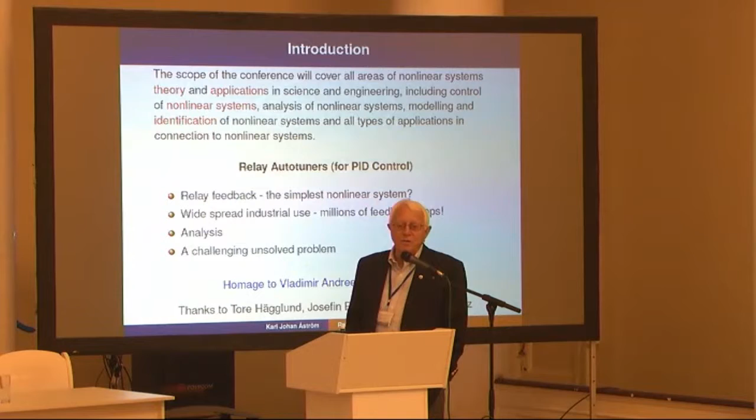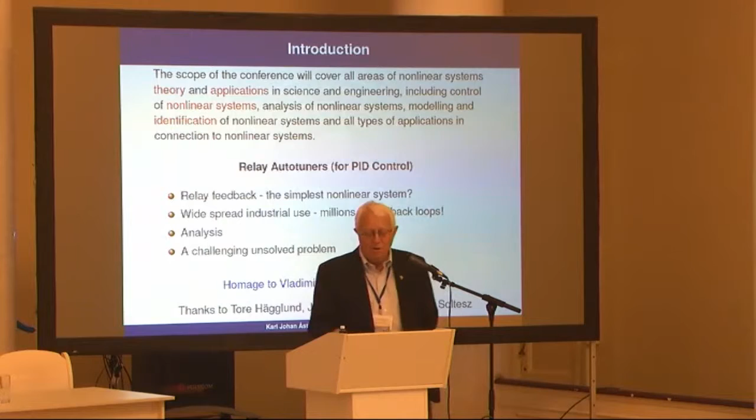I would also like to pay homage to Yakubovich. I met him about a handful of times at international Russian conferences. For me as a young researcher, he was extremely kind and helpful to me, and we also communicated by letter, so I'm very grateful to him. I also have a colleague, Tore Hägglund, who I've been working with for a long time on this. And then I have a new PhD student and a young faculty member currently working on these problems.

So, what about PID control? It's the most common controller. Here is a quote from 2002, where you look at typical industry, 98% of the controllers use PID feedback. You can go back 10 years. Here's an engineer who looked at Canadian pulp and paper, and he said 97% use PI control. I haven't seen anything more recent. He also looked at them quite well.

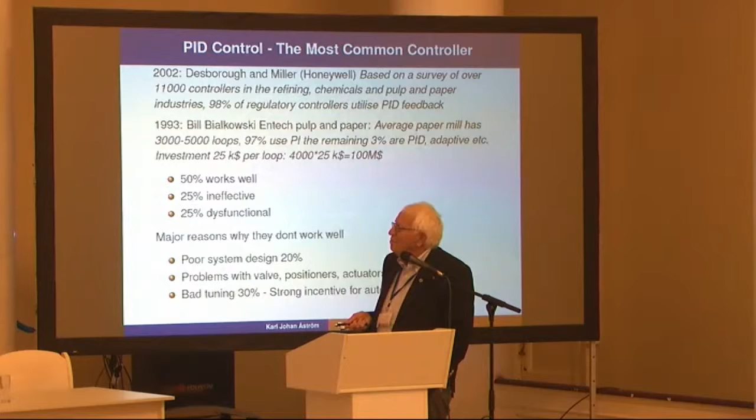About half of them worked very well. 25% are dysfunctional, increasing fluctuations instead of decreasing fluctuations. The main reason is bad system design, problems with hardware, but bad tuning accounts for 30%. So that's a good motivation to try to do automatic tuning to get rid of these problems. That's something I've actually been concerned with for quite a while.

So here is the plan. After the introduction, I will talk about the basic relay autotuner. Then I will talk about current work to make them much better. And then I will introduce what I call the million-dollar question, to classify all systems for which this will work. That's a very clean mathematical problem that I don't know the answer to.

So here's the idea of the relay tuner. You have a feedback loop, and to tune it, you flip over a switch, so the process runs under relay feedback, like a thermostat. Here I show some signal traces. Here's the relay, which switches, and here is the output signal. If you look closely, you see that the input and the output are roughly 180 degrees out of phase. So an experiment like this gives you immediately the frequency where the process has a phase lag of 180 degrees. Also, if you look at the amplitudes, you can get an approximation of the gain. Together with Tore Hägglund, we made patents of this in the early 80s.

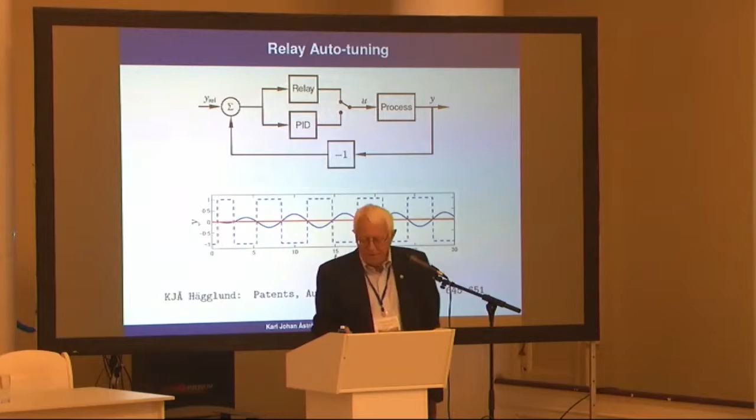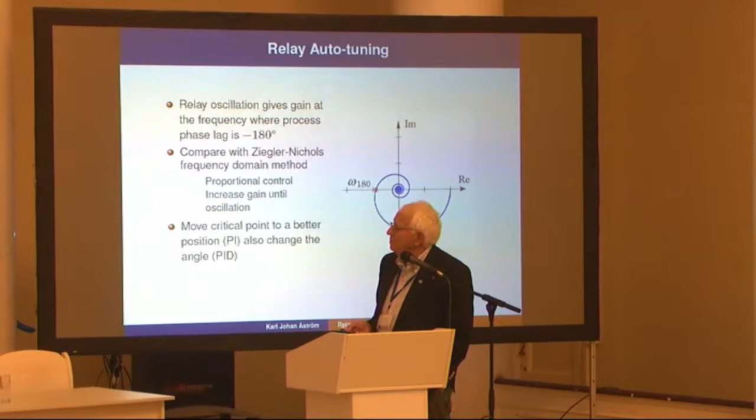We wrote the paper in Automatica in 1984. It turns out that these devices have some nice features. The relay oscillation gives the gain at the frequency, and then you can move this point to some other area with PI control. You have two degrees of freedom. With PID, you can change the tilt of it. So we rigged up a simple version to tune PID controllers based on this, and it has some very attractive features.

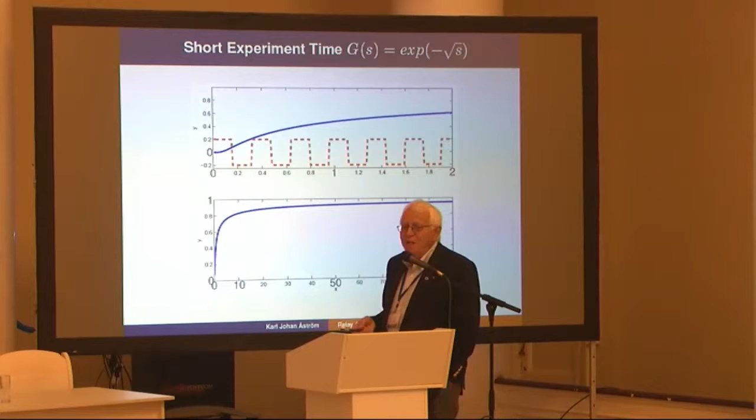For example, it has a very short tuning time. Here I've done an extreme example, essentially a heat conduction process. You see the step response starts very slowly, and then it finally goes up, taking about 100 units to get reasonably close to steady state. If you do a relay experiment, you already see in 0.4 time units that you have enough information to tune a PID controller. So it's much better than doing step responses.

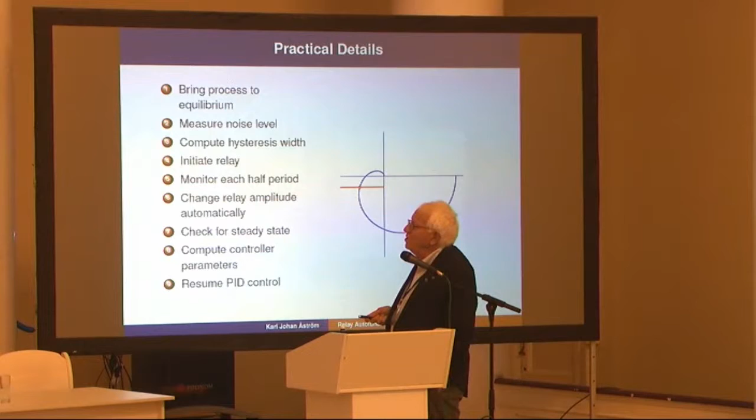There are a few practical details I'll mention quickly. You have to bring the process to equilibrium, measure noise levels, introduce hysteresis in the relay, initiate the relay oscillation, monitor half periods, check for steady state, compute controller parameters, and resume PID control. With hysteresis, if you're using describing functions, you're approximately picking up this point of the transfer function.

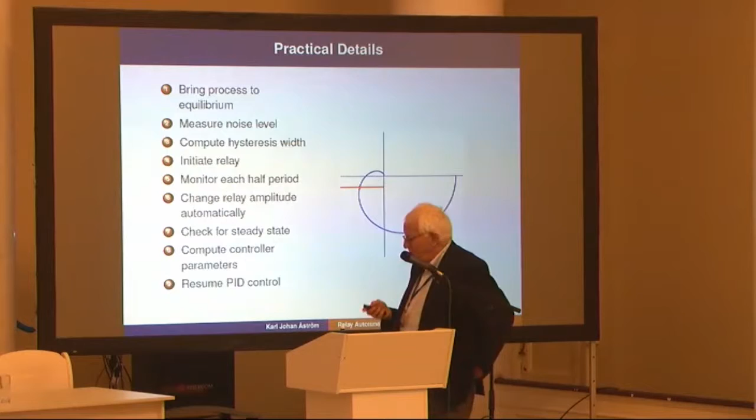So this simple idea has been very useful. When preparing this talk, I picked up the first industrial test, done in 1982. We took an Apple II computer, which we were using in the lab, and tied it to the industrial process control system at the Sugar Works in Arlöv. Here you see the experiment: here's the control signal, the relay, and here's the output. The signals aren't very clear, but here it goes into automatic, and we switch it like this. So it's an example where it's working pretty well.

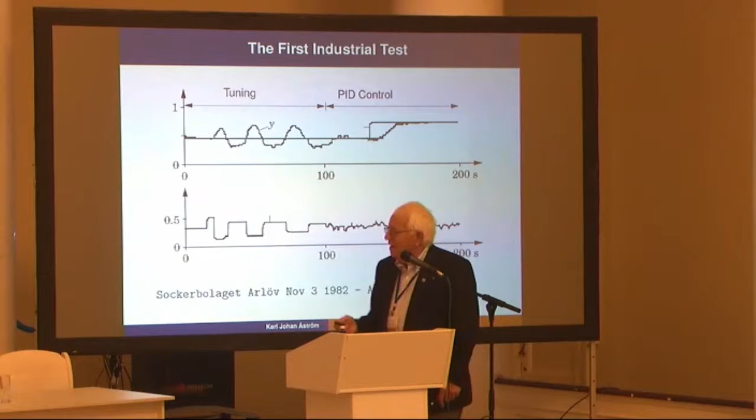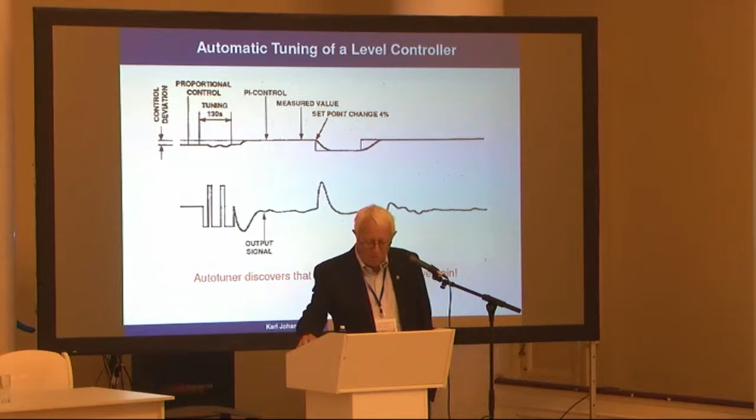Here's another example. You can also use this to figure out if you don't know the gain of the process, which is quite common. So here's an example: there's a tuning period, and then we test it by making a step change. It does pretty well, and in this case, the auto-tuner discovered that the process has negative gain, so the operators don't have to be concerned with that.

This has been implemented in many, many different ways. Before I do this, I'll show you an interesting experiment. We were at an industrial plant in northern Sweden, a small chemical preparation plant for the pulp and paper industry. They had about 100 loops, and it would typically take about 2 to 3 weeks to commission such a system. With the auto-tuners, we did it in 5 days — you connect one loop, tune it, connect another loop, tune it, etc.

Then the people came to us and said, we have this beastly process here that we've never been able to tune, can you help us with that? So we took one of our little boxes and connected it. Here's a strip recording where time runs in this direction, since the unit had no digital recording. You see this process is oscillating. They had a PID controller with a gain of 8, an integration time of 2000, no derivative action. Shortly before lunch, we switched it into manual, and you see it stops the oscillation when it starts to drift. At 2 o'clock in the afternoon, we pushed the tuning button.

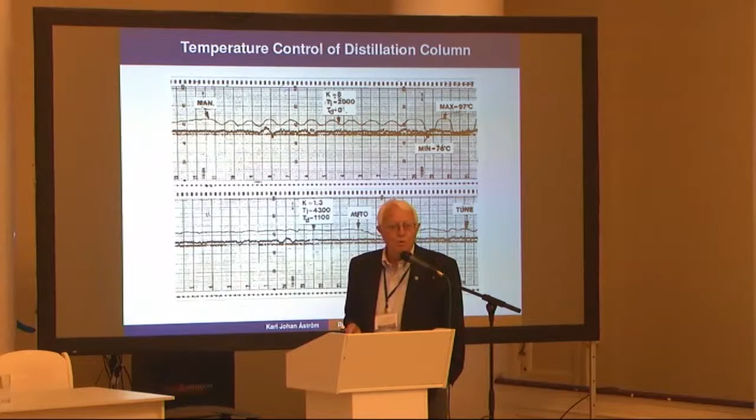Here you see we're determining the hysteresis level, and then you get something that looks like an oscillation. We were waiting and waiting — this is 2 o'clock in the afternoon. At 8 o'clock in the evening, it goes to automatic control. And look what it does — beautiful control. It reduces the gain and introduces derivative action. I think this is a very nice example, because trying to tune manually something this slow would take a long time.

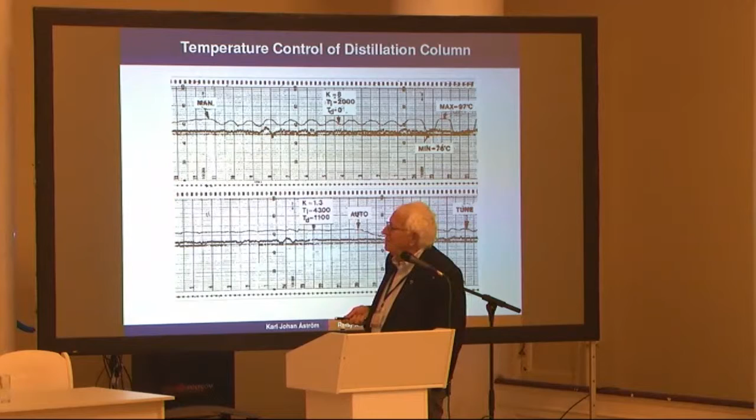And to try to tune manually something that is as slow as this, of course, will take a long time. So they have been manifested in many ways.

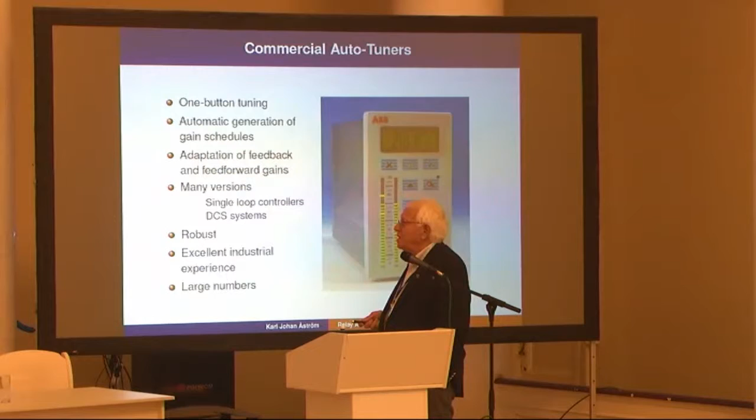It's called a one-button tuner. You can just push a button to tune it.

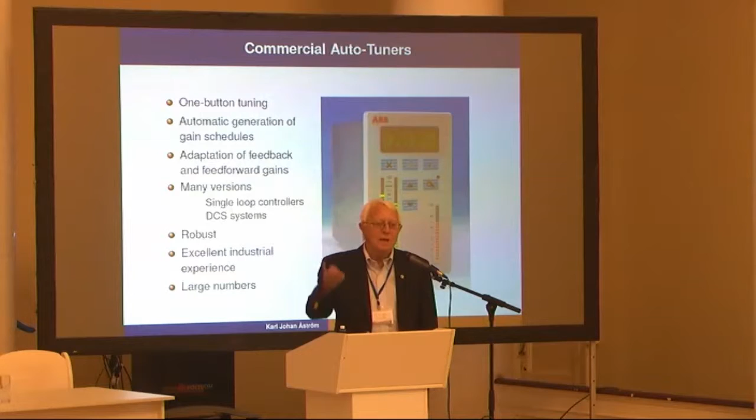We can also generate gain schedules automatically, because when using simple controllers, processes are often nonlinear. So you pick a scheduling variable, set up a table, and then operate in a certain region and push the tuning button. That's how you build up gain schedules automatically.

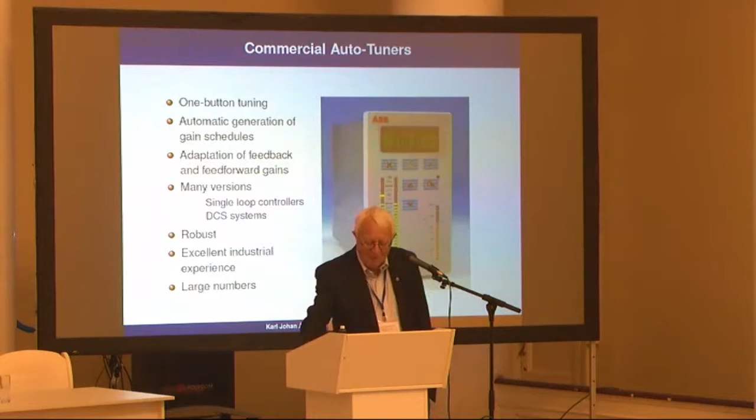You can also introduce adaptation of feedback and feed-forward gain, and there are many, many versions of this—single loop controllers, and others involved in DCS systems, etc.

I'll give you a couple of industrial examples. When we started, we worked with local Swedish companies. In the end, the patents were acquired by a large American company called Emerson, who put it into one of their large DCS systems. And of course, ABB did the same.

So this is where the mass use is coming from. These are typical distributed control systems, both of them, and there are also single loop controllers in here.

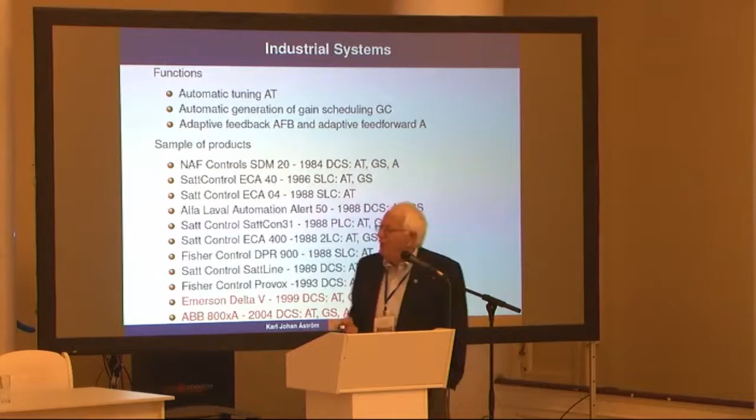I'll give you experience from Emerson, and here's what they say: the tuners can be used by production technicians on shift with complete control of what's going on. In other words, when running the plant, they can take the regular plant personnel and they can run it—the operator is aware of the tuning. And what's interesting, they can teach this and make someone useful in less than half an hour.

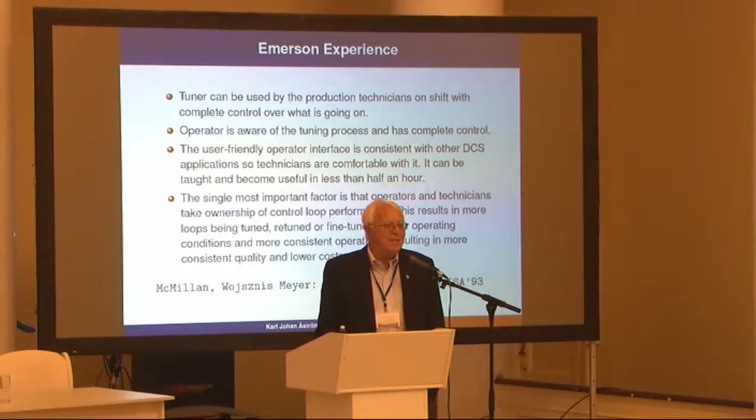Many industrial people are asking for PhD-free control—that is, controllers that can be used by people who are not PhDs. This is clearly one example of that, and it's documented in the paper we're citing here.

So that was a little bit about the basic relay autotuner, which was done 35 years ago, and then it took about 10 or 15 years to make it mature. Now we'll talk a little bit about more advanced autotuners.

First, there has been a dramatic increase in computing power. I still remember the first one we put in—the company said we could use it if we squeezed it into 2 kilobytes of code. Nowadays, of course, we can do much more.

So we can do better modeling. One thing we've discovered quite recently is that it's very useful to introduce an asymmetric relay—a small step in one direction and a much larger step in the other. I'll tell you later why this is so good.

We can also do system identification. Instead of waiting for steady state like we did in the old approach, we just capture a transient and run system identification on it. And if we don't get enough information, we can add additional signals to it.

We can also make assessments of several models here. Instead of doing the very simple thing we did first, we can now really figure out what complexity of model we actually need to describe the process.

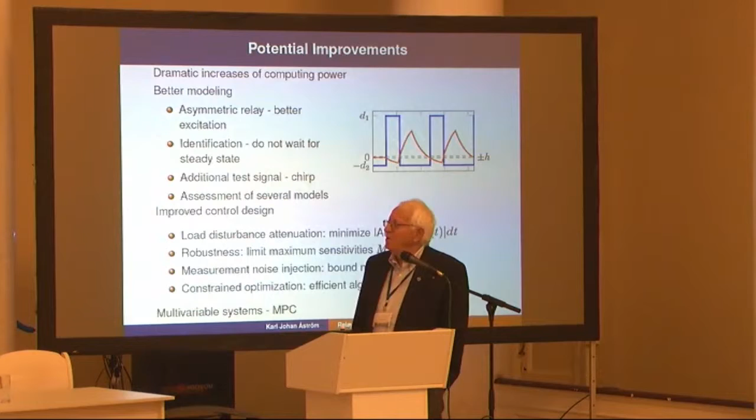We're also starting to look at multivariable systems, and I mentioned MPC here. One of the stumbling blocks for using MPC is lack of models, and we think this type of technique can be used very favorably to obtain the models you need for model predictive control.

So here's a little bit about the design of PID controllers. Many processes in industry have monotone or almost monotone step responses, and you can often approximate transfer functions by a time delay and a time constant. There's one parameter here that's important—I call it the relative time delay.

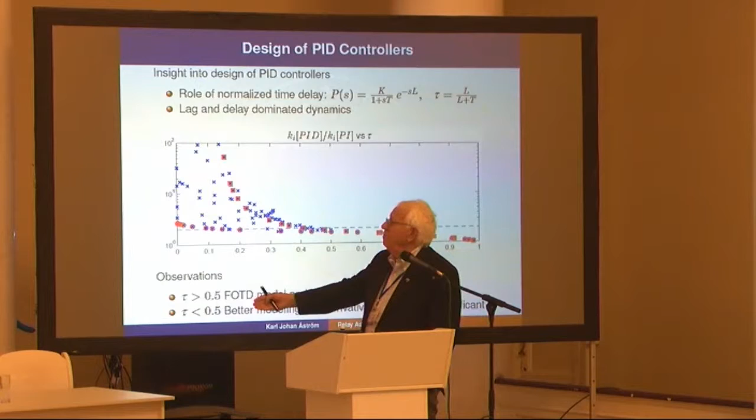It's the ratio of L divided by L plus T. So if tau is equal to 1, the process is dominated by time delays. If tau is 0, it's dominated by dynamics.

We've obtained large batches of representative transfer functions from our colleagues in industry—about 150 to 200 test examples that we run against. Using these test examples, we've been designing PID and PI controllers.

We've been plotting the integral gain of the PI controller, which is a reasonable measure of performance. High gain means good performance. We also plotted the gain of the PI controller as a function of the normalized time delay, and we got a curve like this. Here's the normalized time delay.

We see that if you are time delay dominated, PI and PID give essentially the same result. Then as we get more and more dynamics, PID gives roughly twice the performance up to 0.5. Down here, there's a very big difference between PI and PID controllers.

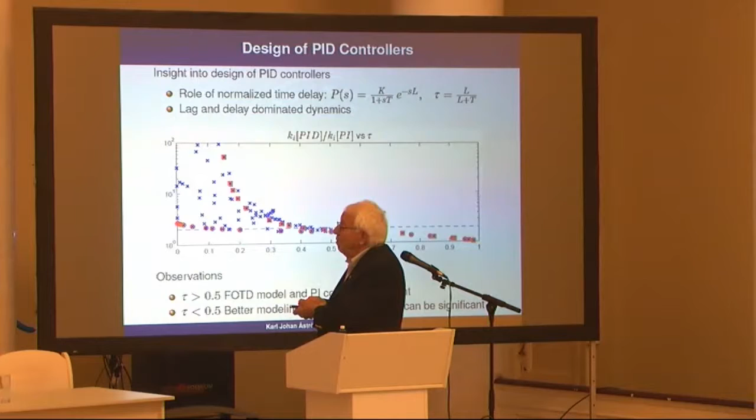So here is a region where improved modeling makes a lot of difference. Up here, we can just use a PI controller. In here, derivative action may pay off, and we can still use a very simple model to do this. Down here, it pays a lot to do much better modeling. So by doing empirical studies of this, we learned something.

We also have to do initialization and use the asymmetric relay. It very often happens that you have friction in valves and things like this, so we always start with a little exponential increase here.

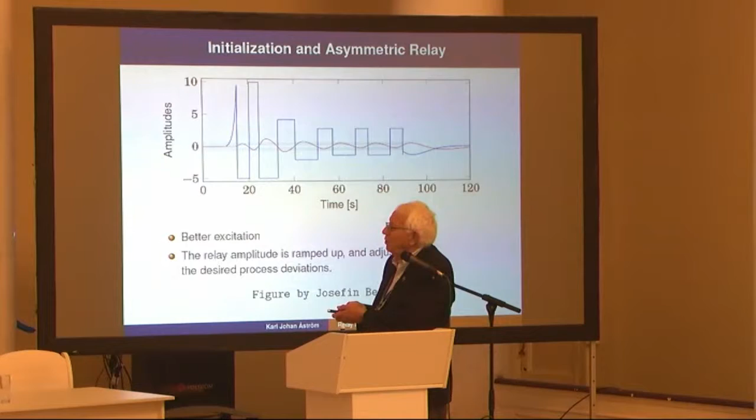There's an absolute limit to how much we can change the control signal, but the important thing is how much we allow the control signal to fluctuate. There's a simple feedback loop that arranges this. And also this startup feature gives you actually quite good excitation.

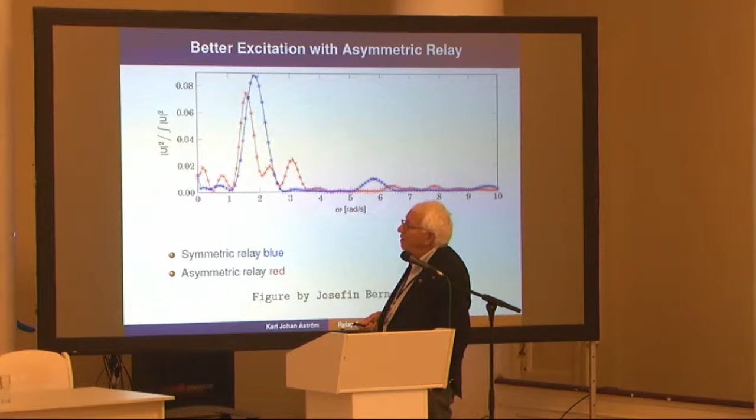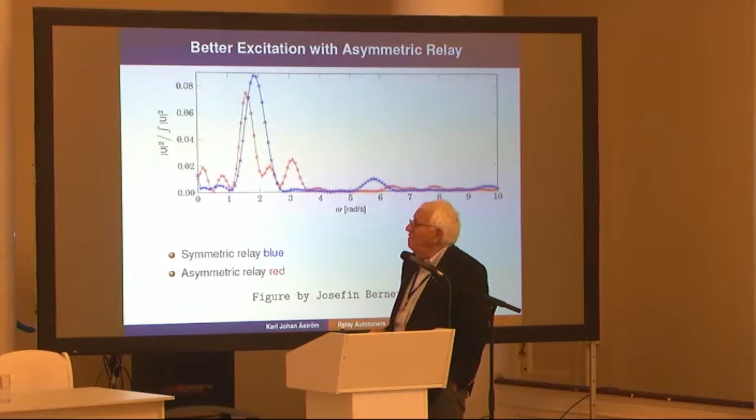When you use an asymmetric relay, you see you are getting a peak here, and two peaks down here. So the asymmetric relay gives you much better excitation, not just around this frequency, but spreading out a little bit. So it's a useful, practical little thing.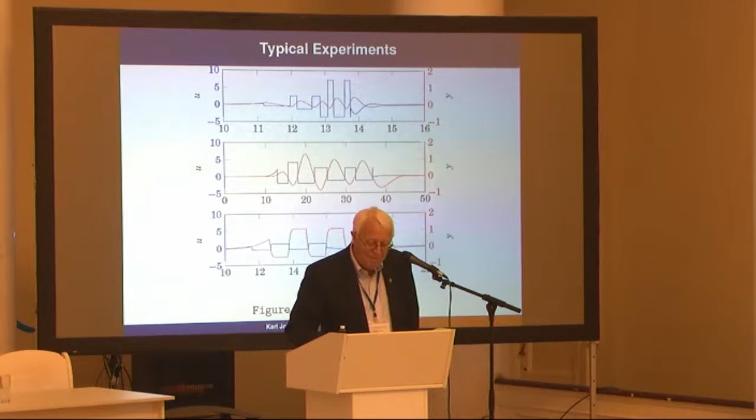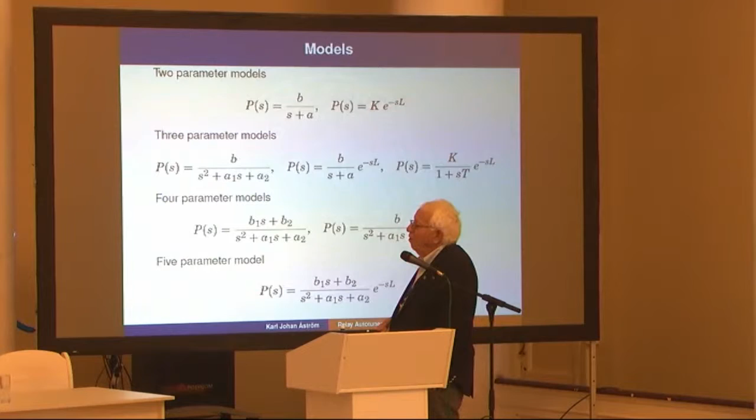Now I'm going to skip this. When you do system identification, it's very useful to try to fit a spectrum of models. These are some very simple ones, here are some slightly more complicated, and then we can start to use models of second-order dynamics with a zero and a time delay in here.

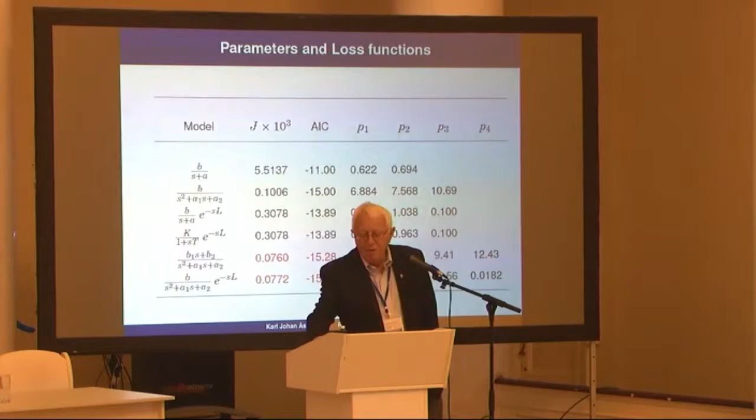So by doing system identification, you go through the usual system identification exercise, calculate the loss function, see it run down, and then look at the Akaike criterion. In this case, it tells you that you are much better off using second-order models instead of what is customary for PI and PID control. So system identification here can help us a lot.

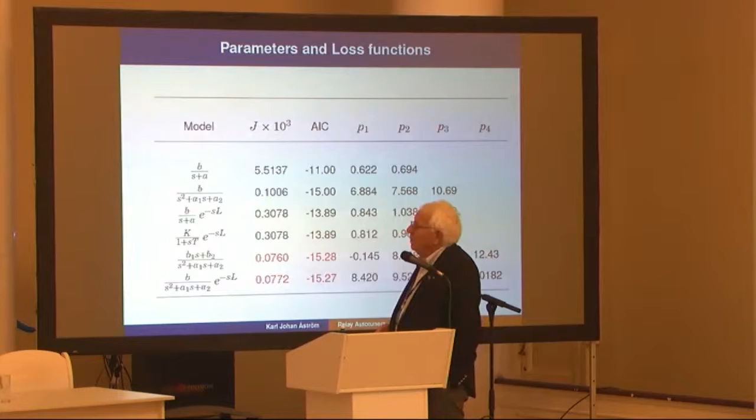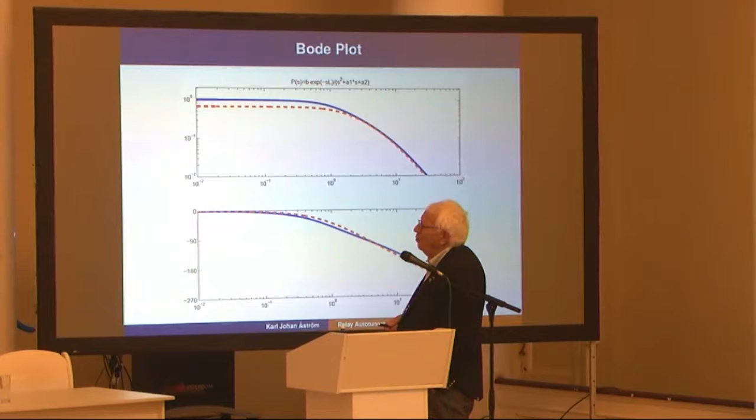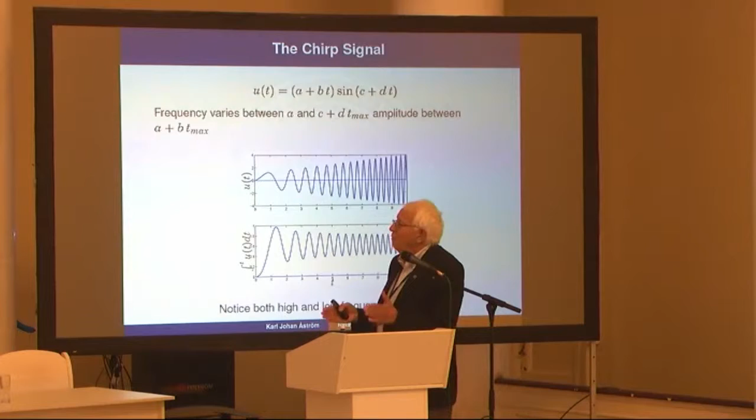Normally integral action will take care of this, so that's the reason why simple models work well. But sometimes it's really worthwhile to get better low-frequency models, and that's something we can achieve by introducing chirp signals. After making the relay experiment, which we keep short, we know roughly something about the model, and then we can design a chirp signal that is designed to give better excitation in the other area.

And here I show two curves. Here is the output of the relay experiment and the process model, and here is the output and the process model with a chirp signal.

And with this chirp signal, you also get a little bit of DC component on it. And now you can really squeeze down here what the transfer function looks like.

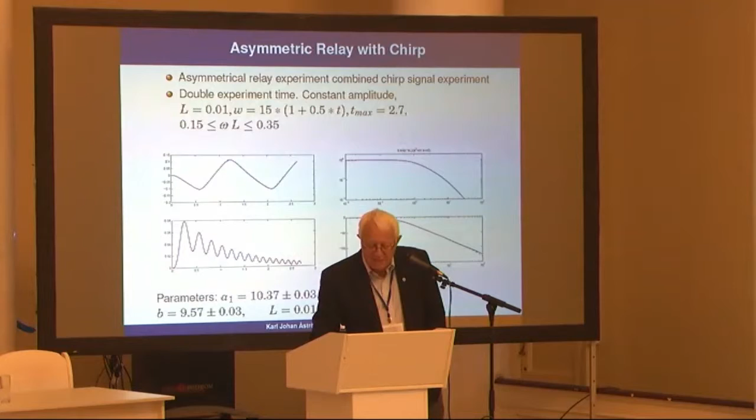So adding an extra experiment really gives you much better models. I've shown you here noise-free data, but you get essentially similar things when you have noisy data. So if you just do the simple experiment, you get this. But if you're now adding the chirp to it, you can really get much better modeling.

So that was a little bit about the empirical stuff. And now we come to the really fun stuff, the million-dollar question. We've been running this type of systems on a lot of simulation examples, and on a lot of industrial processes where we gather information. But we still don't know this.

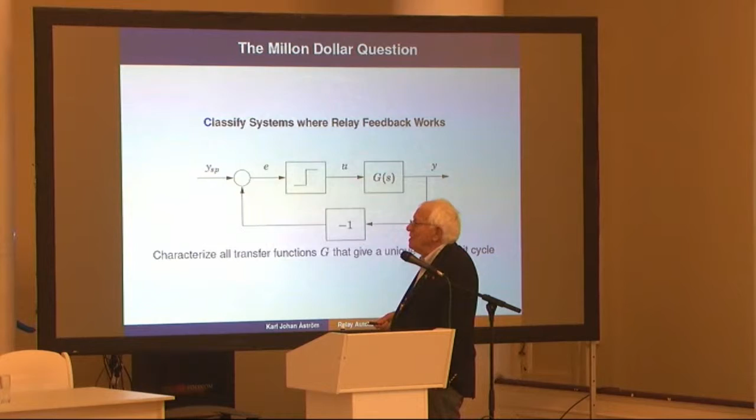Take a linear time invariant system, connect the relay here, and then we have a simple feedback loop. And we just do relay without hysteresis. I'm very interested to know: give me a class of transfer functions where I get a unique limit cycle of this system. If anybody could come up with a smart solution to that, I will be extremely happy.

I've been trying myself for many years. I have had some very strong collaborators who've been trying to help me. And we have come a little way, and we have lots and lots of examples, and lots and lots of counterexamples. But we have not been able to come up with a nice class of transfer functions here where this is going to work.

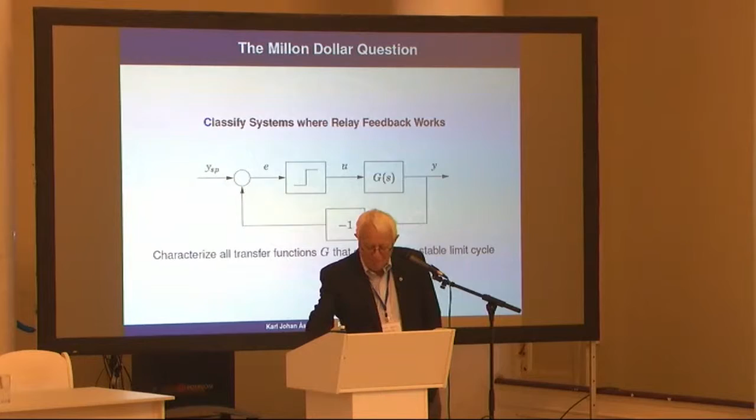So this brings us, of course, to relay feedback. I used to say that these are the simplest nonlinear feedback systems, but I'm not so sure anymore. And these systems are very common, not only here.

Delta sigma modulators are very common. Admission controls in networks. It's a simple model for Coulomb friction, etc. And it's a classic field. A lot of the very interesting work has been done here in the Soviet Union.

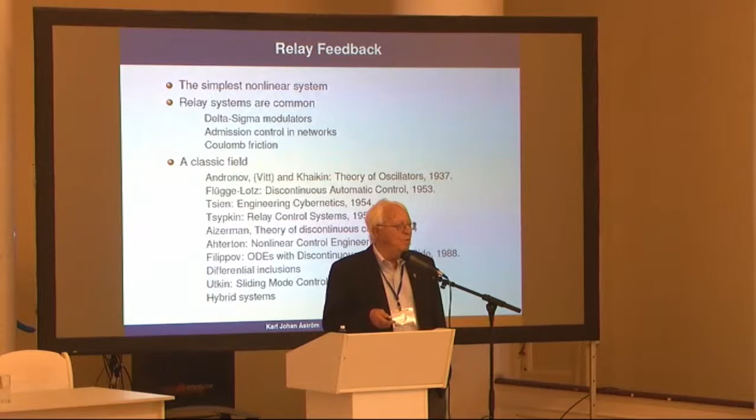And I listed here some of the main research: Andronov, Vitt and Khaikin, Flugge-Lotz, who immigrated to Stanford. In Tsien's book on engineering cybernetics, there is actually a full chapter on relay feedback. And of course we have Tsypkin, who did stellar work on relay feedback. And you have many more.

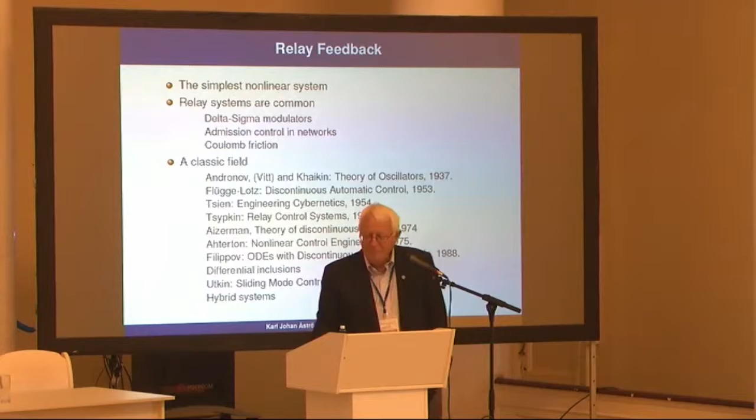You had Filippov, who looked at differential equations with discontinuous right-hand side. His work is extremely useful when we are going to simulate. You have, maybe you should describe the problems by differential inclusions instead. You have Utkin's sliding mode, you have hybrid systems. So there's a lot of work sitting out there.

And for example, to figure out the limit cycles, we can progress in many ways. We can find necessary conditions, and we can find local stability, which we have done. Global stability for specific cases have also been done, and there are both frequency domain conditions.

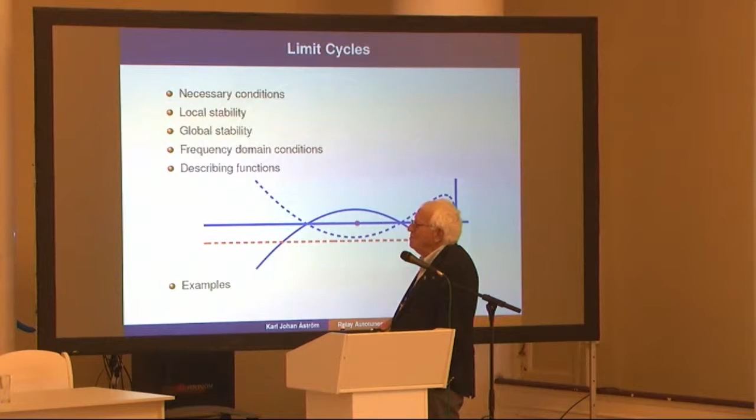In a very simple way, if you plot the Nyquist curve in here, and then you do describing function analysis, with a relay you get this, so you have potential limit cycles in here. That would be a very, very simple way of doing this.

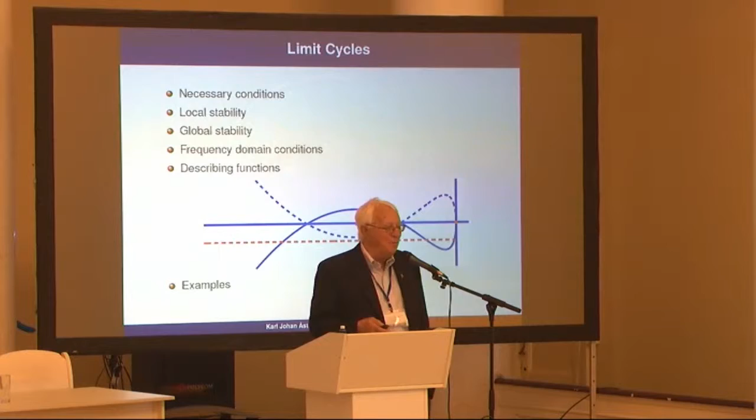So what I will do now is go through a number of examples where you have strange behavior. But first I do a little bit of analysis.

We have a linear system, and I do this without time delays. You can easily extend this to time delays if you want to. And we assume that you have a relay that switches when CB equals 0, so there's no direct term in the controller.

And then we start at the switching point, and then we integrate over half a period. And then we find out that the condition for oscillation is that when you follow a half trajectory around, you will find the time for a half trajectory.

It's when the relay switches again. So this function here has to be epsilon over d, where epsilon is the hysteresis width and d is the relay. So there's a function in here which tells us precisely the values of h where we can have a limit cycle oscillation. This result is about 20 years old.

So with this one, we can actually analyze specific cases.

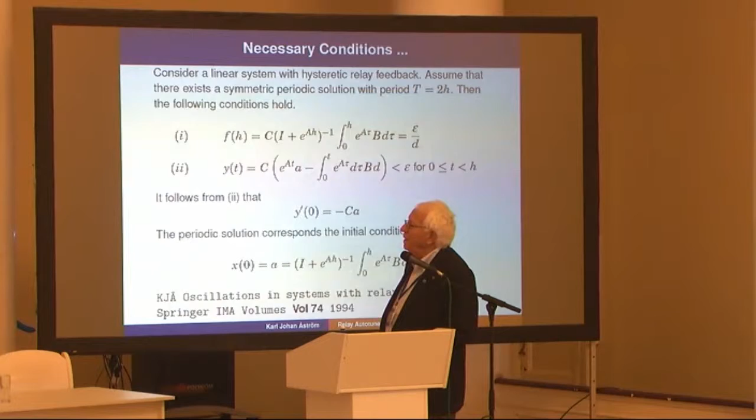We calculate this function to find when it's zero, and we also evaluate the control signal over the period to make sure it doesn't switch in between. The periodic solution corresponds to the following initial conditions. That's a pretty straightforward linear systems calculation, which can also be extended to systems with time delays.

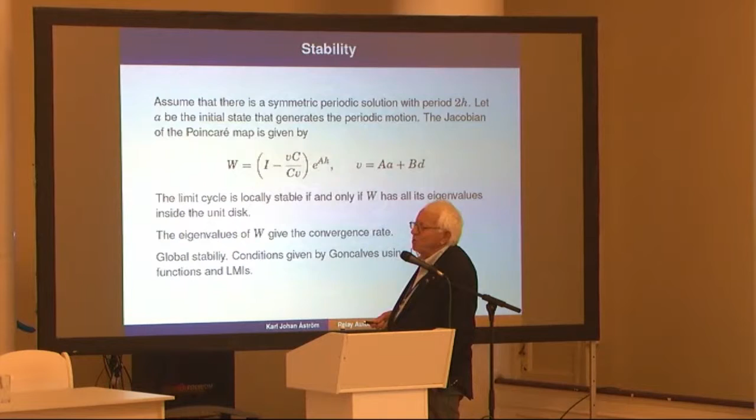For local stability, we can calculate the Jacobian of the Poincaré map, which has a nice explicit solution. Once we got the h, v is essentially the velocity when it's switching. So you have a very nice expression for this. You may notice that if we have a first-order system, W is going to be 0, so when we have first-order dynamics, it switches very quickly.

There's a result of global stability by Goncalves and Lyapunov, and I think it was also inspired by Megretski, who came here from St. Petersburg, that if you have a particular solution, you can also analyze the global stability of that solution using Lyapunov functions and Yakubovich LMIs. So for a specific system, we can really calculate what happens.

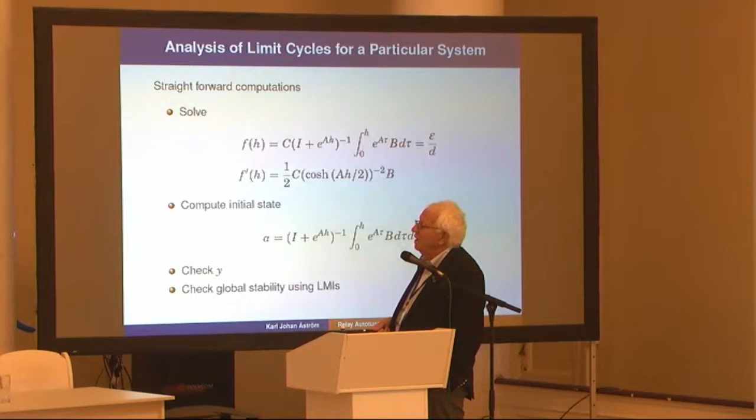What we do then is take this function. We can easily calculate the gradient of this, and you can do very efficient Newton-Raphson iterations. We compute the initial state, we check the y's, and then we check for global stability. So in a specific case, it's a very simple problem to analyze.

There are also nice frequency domain conditions. If you look at what this condition means, it means that if you calculate the pulse transfer function of this system, you evaluate when z is equal to -1. This should equal epsilon over d. So this gives us a frequency domain interpretation, which is very natural.

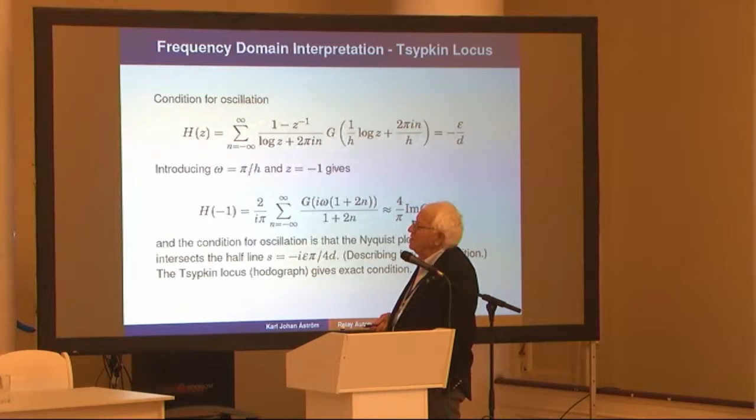When it's oscillating, you apply sample data theory. Tsypkin did this. If you use the expression for the pulse transfer function in terms of the regular transfer function, you have this expression, and if you apply this, you get the Tsypkin locus, which is exact instead of having the describing function analysis for this.

So here are some examples we've been through. If you have an integrator, you get chattering. If you have a double integrator, you have infinitely many limit cycles. If you have an n first-order system, you have n-1 limit cycles, so one of them is stable. If you have systems of this type, you have one stable limit cycle.

If you have a first-order system and time delays, you have a very interesting situation. You have one stable limit cycle, and it's an infinite dimensional system, so that's infinite memory. Then you can load it up with something that's a periodic solution.

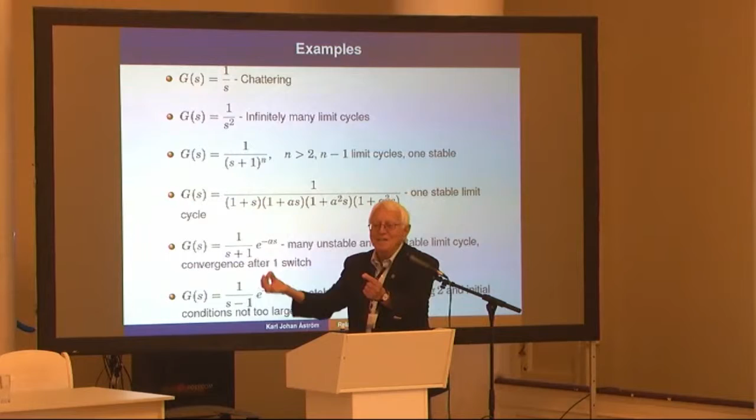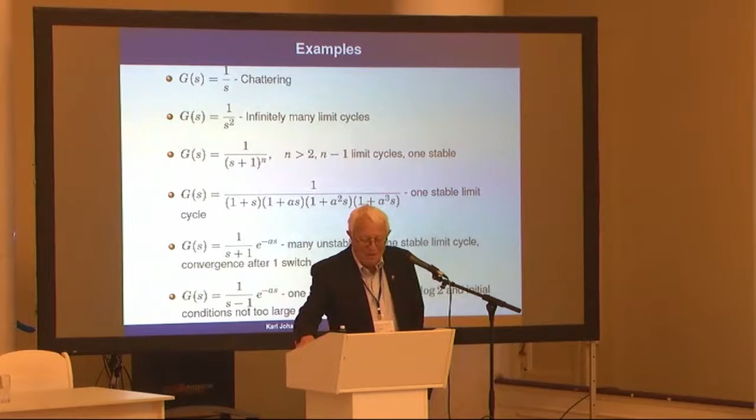If you match this to the switching, you can get a stable limit cycle. You can actually get many unstable limit cycles to this, but there's only one stable limit cycle. If you have an unstable system, you have one limit cycle if the time delay here is not too large. So there are a number of cases here that we understand quite well what they behave, and many of them correspond to things similar to industrial situations.

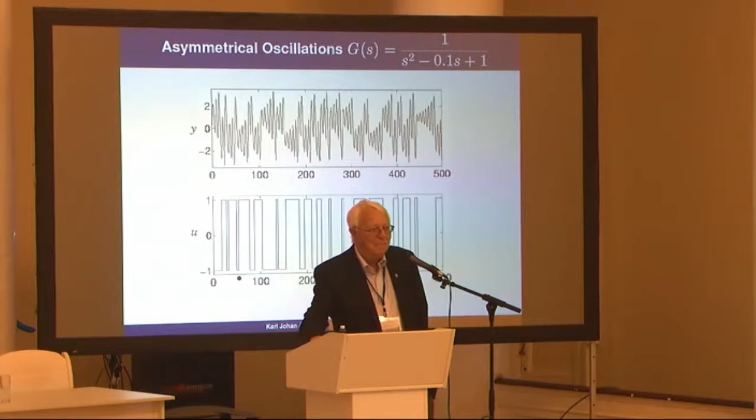Now let's look at the weird cases. Here's a simple system, unstable with oscillatory behavior. And here, even if you have a symmetric relay, you get asymmetric oscillations. So these are clearly cases that have to be excluded.

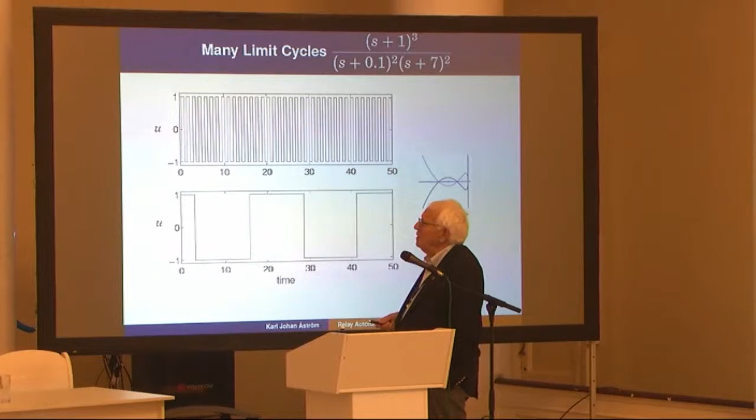And now we are coming to the bad cases. Here I had the real pleasure to have Barabanov from St. Petersburg in Lund, and we were working with Karl Henrik Johansson, who was a PhD student at the time. He's now a stellar professor at KTH. Anders Rantzer is sitting in here, and Barabanov and myself, and we were trying to understand a system of this type.

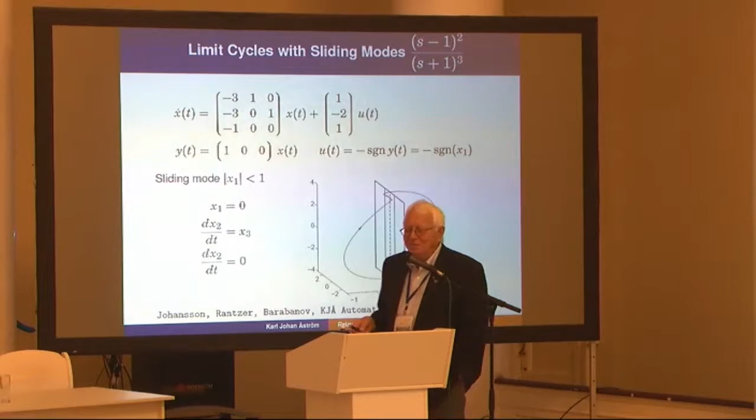Here's another interesting example. It's now a system with pole excess 2. We still have unstable zeros. With pole excess 2, if it was nothing else, if it was just 1 over s squared, you can have infinitely many limit cycles, which are just circling around. In here, you get a very interesting limit cycle, which I have an illustration of on the next slide.

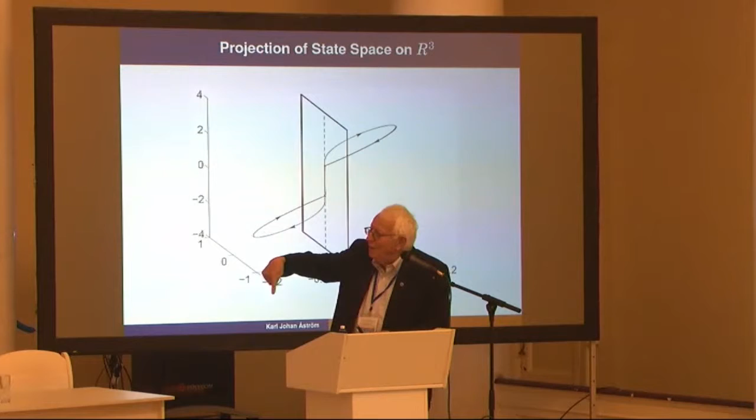So now this is a projection because it's a three-dimensional system. Here's the switching plane. So what's happening here? We have a limit cycle where it's shooting out of the switching plane, then it comes back, and then you see we have a line here. What's happening is that the solution is circling down the line with decreasing amplitude. So it's coming in here and circling down the line with decreasing amplitude.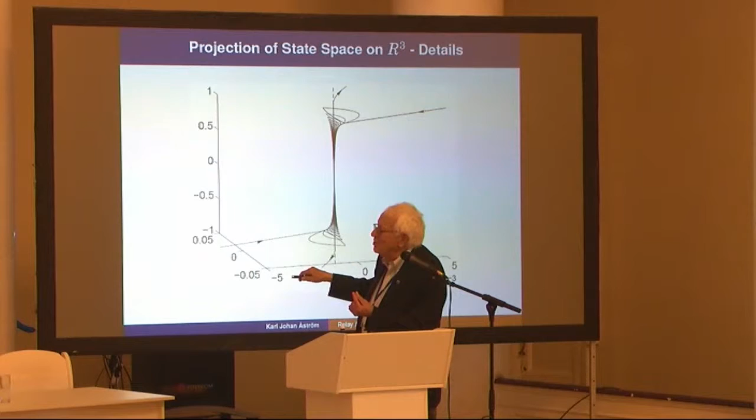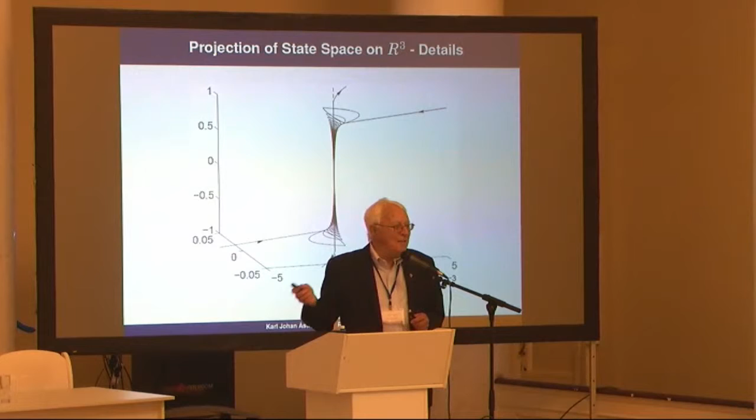And since the inverse dynamics is unstable, it comes pretty close to this point in here, and then the oscillations start to increase again, and then it shoots out. So we have a limit cycle here with some very interesting switching phenomena. So even if I said that relay feedback is the simplest nonlinear systems, I hope that these two examples will convince you that they are not that simple.

So that was a little bit about what I call the million-dollar question. So let me now try to summarize what I've done.

I gave a little introduction and then I spoke about the basic relay autotuner. It's really a very simple idea. You switch in a relay, you get a limit cycle oscillation, you analyze this, and then you can go back and get a PID controller. And today, with increased computations, you can do this in a much better way.

And we are actually working quite actively on that in the department right now. I brought up the million-dollar question, which I would be very happy if somebody comes up with some ideas about. There are interesting things happening in nonlinear systems right now. For example, Anders Rantzer mentioned to me on the plane that there are interesting new results emerging on limit cycles in nonlinear systems, which may apply to this.

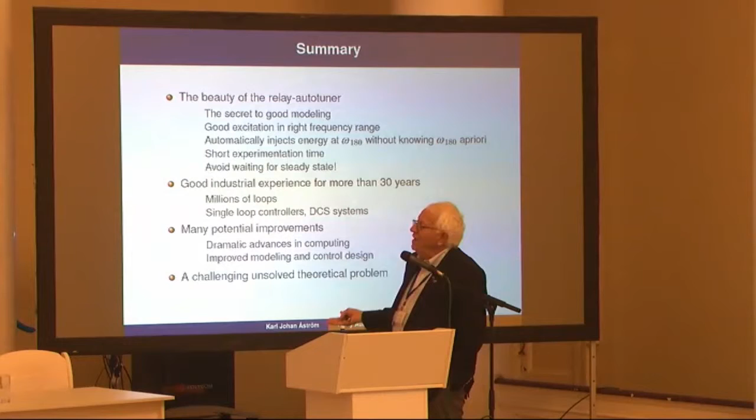So then we come to the summary of this. I think the beauty of the relay autotuner is that it gives automatic excitation in a good frequency range. If you're going to plan a system identification experiment, you need to know something about the process in order to excite it in the right way. Here with the relay, we're exciting it where the phase lag is about minus 180 degrees.

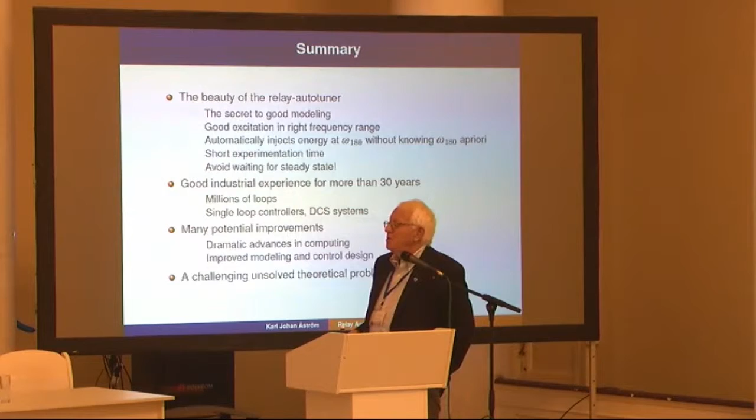So we're automatically injecting a lot of energy at this frequency without knowing this frequency a priori. We can have short experimentation time. There's no reason to wait for steady state. We can just use a transient and run system identification. And industrially, there's a big virtue in having a short experimentation time, because then not very much can happen.

There's very good industrial experience of it. There are millions of loops, both in single loop controls and DCS systems, and there are many potential improvements. And so we have this challenging, unsolved theoretical problem, which I would very much like to see solved before I disappear from the scene. Thank you very much.

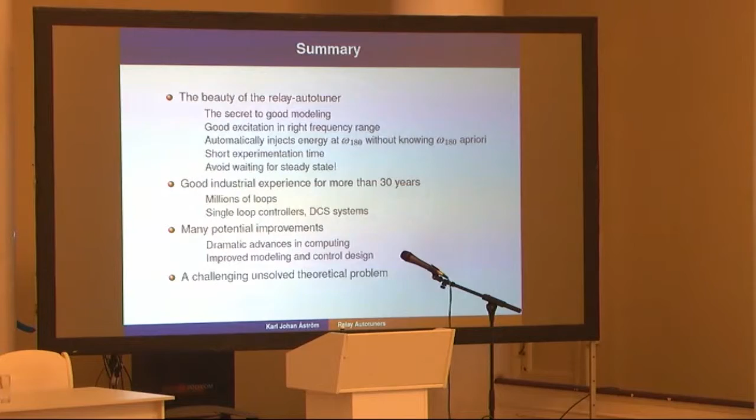I have a question. Does it make sense to try to apply it to biological systems like heartbeat, to improve it using relays and switching?

Biological systems are not my forte, so I would just say maybe. If I may be allowed to tell a story related to Yakubovich. I was at the mathematics department at Brown University, which was run by Joe LaSalle. He had just finished this little book about Lyapunov stability. A student came up and asked him, Professor LaSalle, would you accept me as a PhD student working on stability problems? And Joe LaSalle said, well, I don't really think so, I think it's more or less a closed field. A year later, the Popov, Yakubovich, Kalman theory came around, which totally changed the stability field. So I think it's very difficult to make predictions.

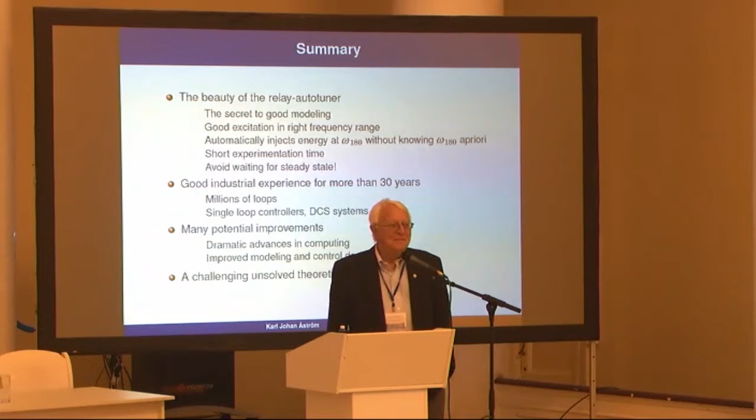Thank you. Any more questions and comments? So thank you very much.